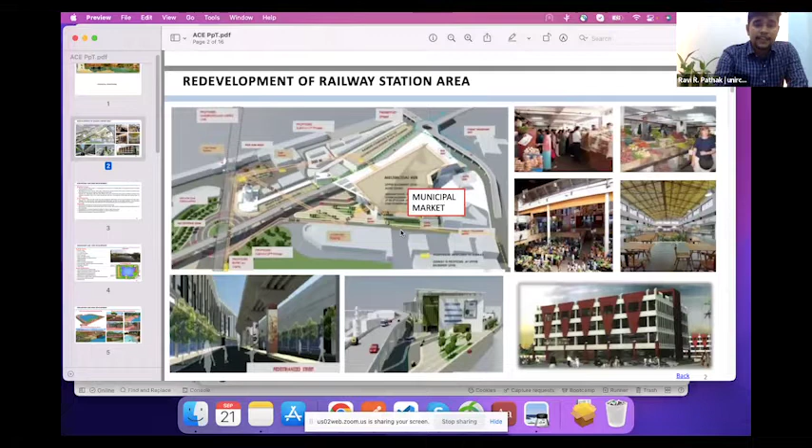Let's come to the redevelopment of the railway station, which I worked on for Patna Smart City. Here is the plan of the railway station, the master plan of this city. And at some distance, there is the Adalatganj Lake area development.

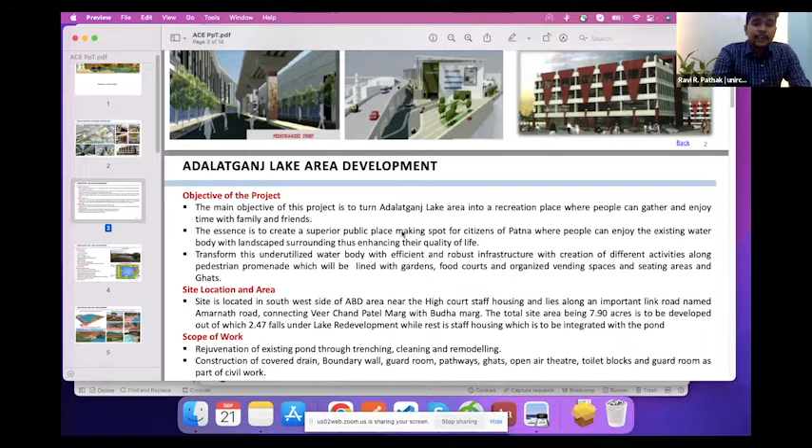The main objective of this project is to turn Adalatganj Lake into recreational space, where people can gather and enjoy time with family and friends. It has an area of 7.90 acres, and the scope of work is rejuvenating the existing pond through trenching, cleaning, and remodeling.

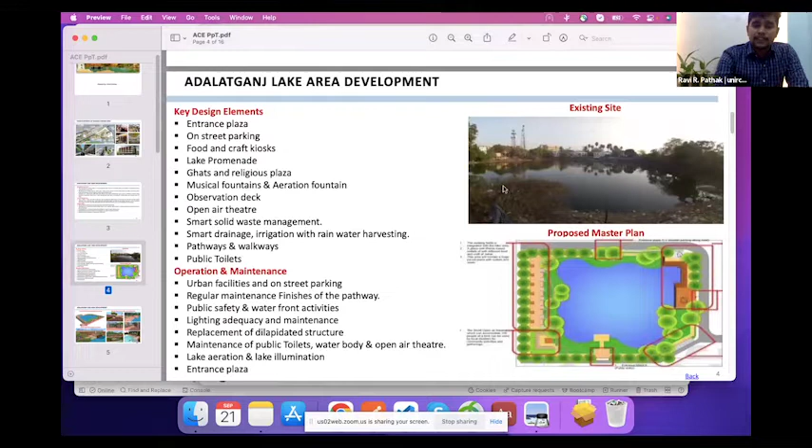Here's the existing picture of this lake, which we turned into this proposed master plan. The master plan of the existing Adalatganj Lake has design elements including the entrance plaza, on-street parking for people who come to enjoy with family, food and craft kiosks for gathering purposes, and ghats for a religious plaza.

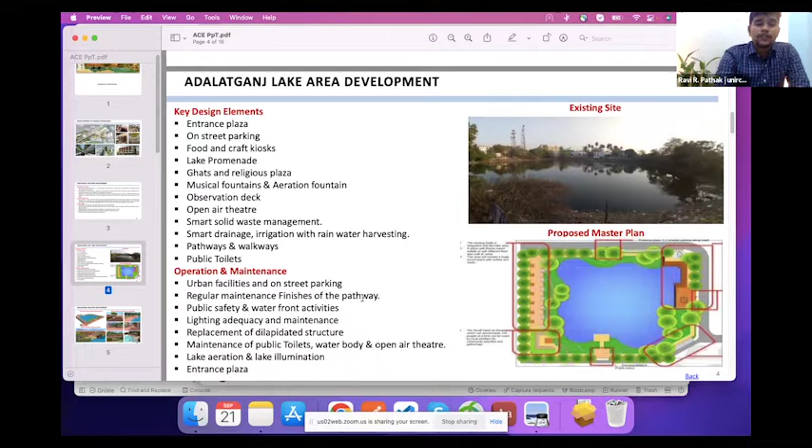As we know, our main occasion is Chhath Puja, and people can perform their religious activities here. There's also an open air theatre for youth, and smart drainage and irrigation with a rainwater harvesting plant.

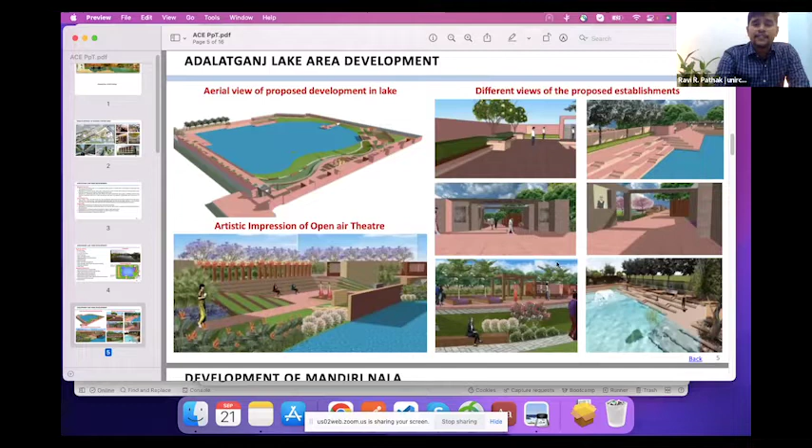Here are some views of this project, like the OAT where people can sit and enjoy quality time, and here is the entrance area, pond area, and landscape area.

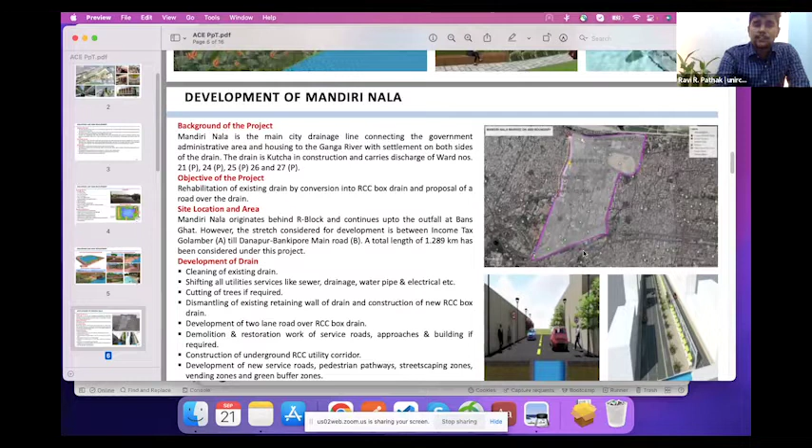After this, there is the Mandiri Nala, basically the main city drainage line connecting the government administrative area and housing to the Ganges River. It is located in Patna, and the main scope of work is cleaning the existing drain and shifting all utilities like sewer, drainage, water pipes, electrical cuttings, and cutting trees, and developing the main area.

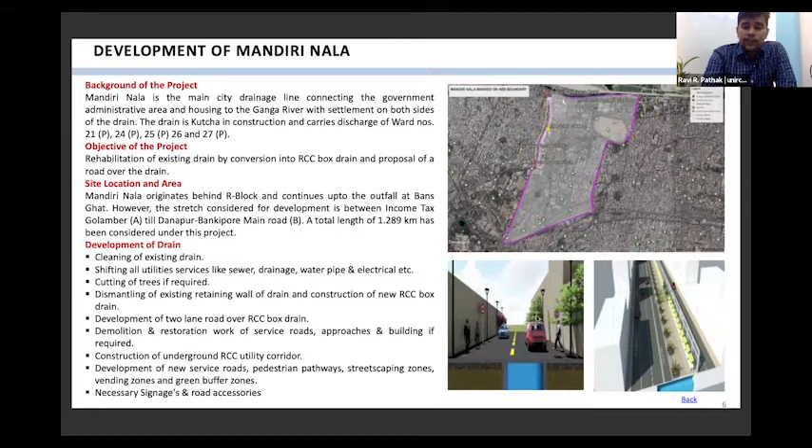Here is the scope of work, with some engineering drawings and execution drawings attached. So here is the Bakarganj Nala.

Bakarganj is mainly known for the electronics market, and here is the nuisance where the drainage is not working well. This is a critical evaluation of the existing storm drainage system in Bakarganj Nala. Analyzing the rainfall data collected from the nearest rain gauge, we adopted a design, with identification of the ultimate receiving body of the storm runoff together with the relevant features.

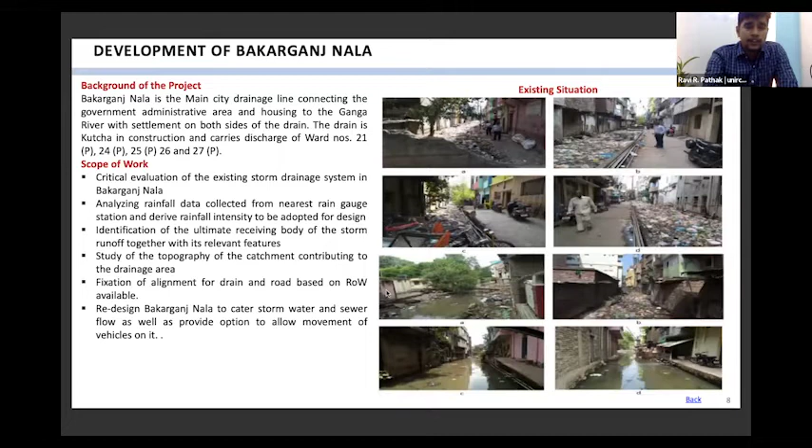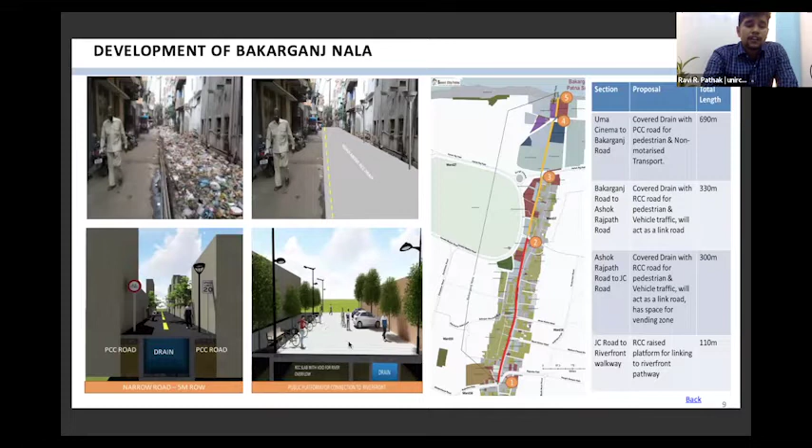Here is the stretch of the Nala, and here is the point where all the spaces are designed. Here is the road above the drain.

Here is the mega screen at Gandhi Maidan, the main ground of Patna. A big screen size of 80 by 40 is proposed for viewing, within an area of 100 to 150 square meters. The screen is to be used for movies, social fundraising, and other events requiring outdoor projection.

Here is the major component of the open air theatre, where a projector with edge blending and audio system is set up all over this area. And here is the roof.

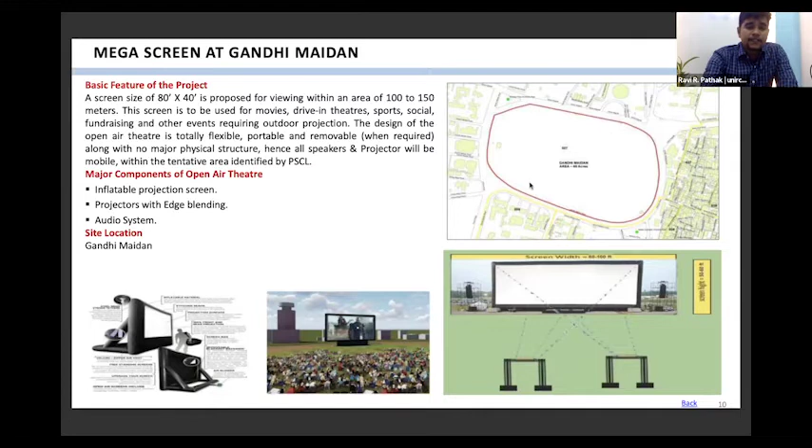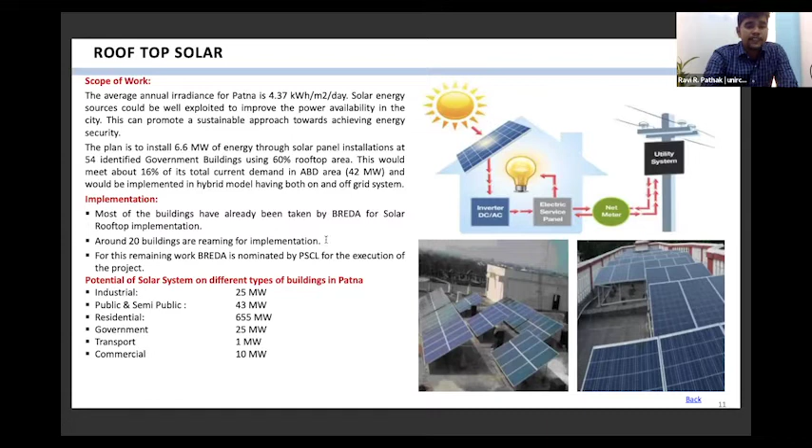Gandhi Maidan is part of this area, and here is the Mahatma Gandhi Statue. The theme of the project is to design and detail the illumination of high-rise buildings. Here is the Biscomaun Bhawan, the main building of that area.

And here is Golghar. For the beautification of this area and the details for illuminating high-rise buildings, the primary objective is beautification of the surrounding buildings, as the area is crowded at all times.

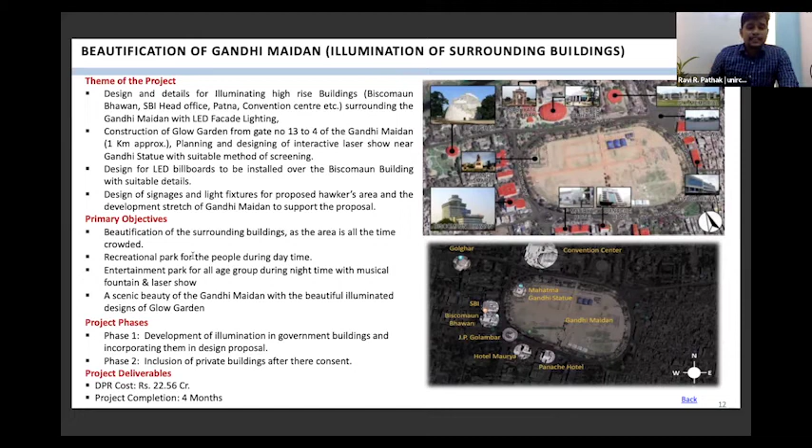Here is the primary objective, and here are some views after the illumination was done on the building, showing how it attracts people and gives aesthetic value to the building. Here is the initial state and after the illumination. Here is the after effect of Golghar, and here is the after effect of this Biscomaun Bhawan.

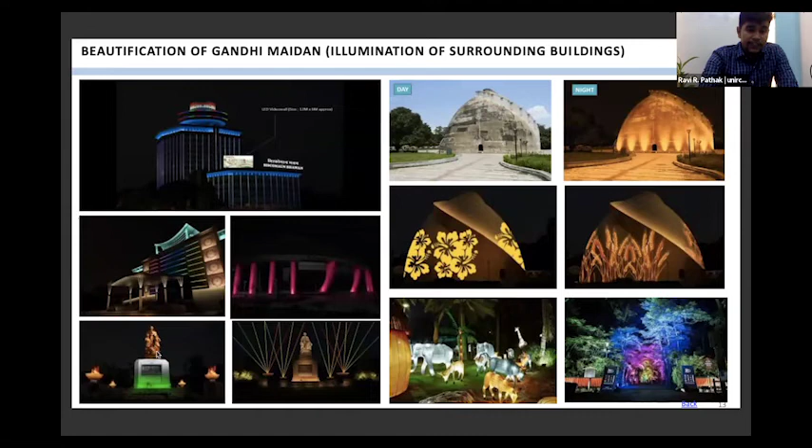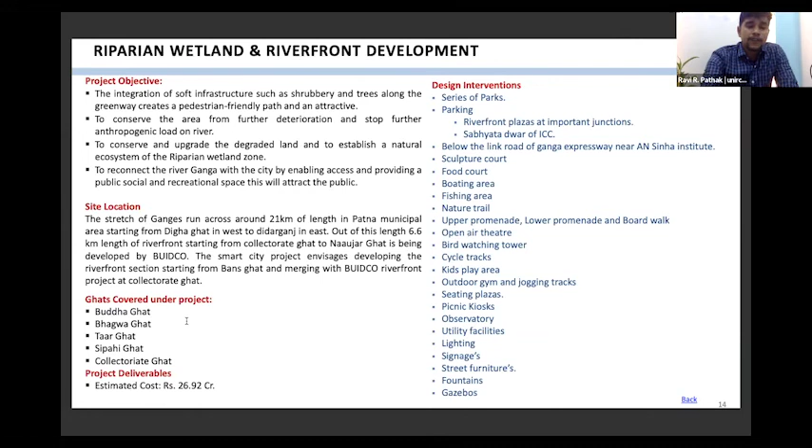And all the riverfront development, which includes Buddha Ghat and Bhagwa Ghat. Here is the ghat redeveloped by the Bihar government through the smart city project, and here is the riverfront development, where all the ghats have been redeveloped along this stretch.